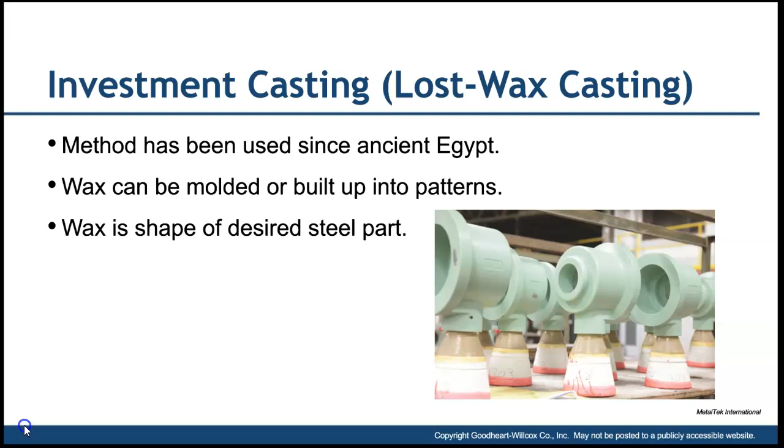So in the lost wax casting method, wax is molded and built up into patterns. So of course that wax is put into the shape of the desired steel part. Nice thing about wax is you get a nice smooth surface finish. You can form wax in a variety of different ways as well. Now, once we have that wax pattern, it gets covered in a ceramic slurry. That slurry is dried, and then the wax is melted out, leaving the hollow ceramic shell.

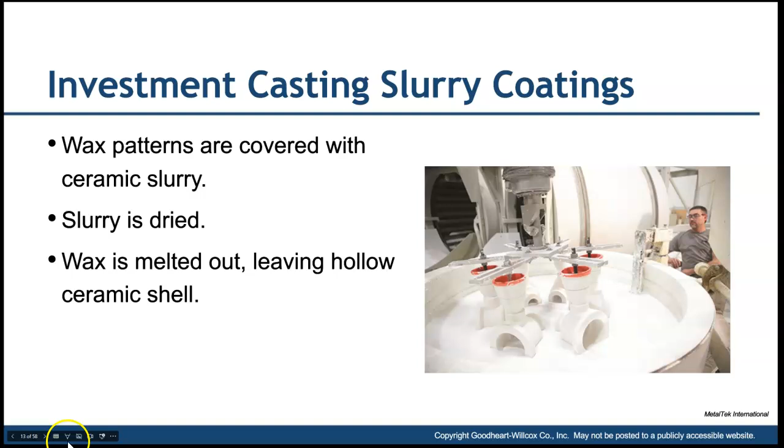So we also can do the same thing with styrofoam. The molds are then heated and liquid metal is poured into the hollow cavities; the styrofoam also gets melted out and removed and used in place of wax as well. So both of those are valid ways to help us create these cast parts.

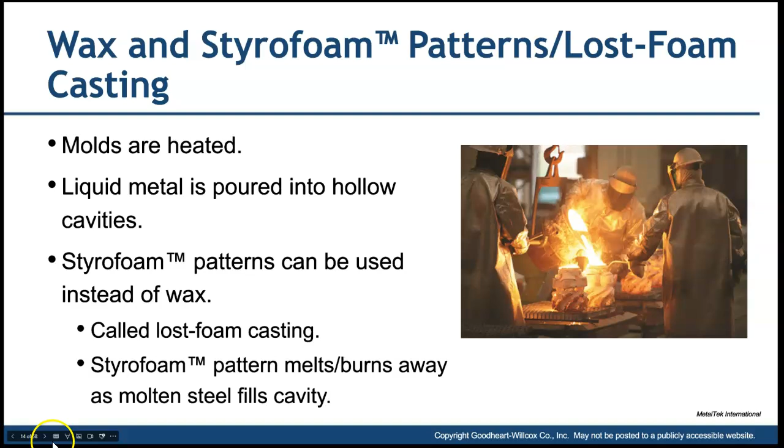So after the metal is poured into the investment casting, that metal cools, the shell is removed. So your parts have the exact same shape as the wax, and likewise the surface finish tends to be better with wax investment castings as opposed to sand castings, just because the wax is a smoother, nicer finish overall.

So generally, these parts are on what they call a sprue. The sprue is part of the actual process to allow air holes or venting or even the pour, and the connection, especially if you're doing a cast of multiple parts. If you've ever put together a plastic model kit, you have all the pieces that you break off. Those pieces are being broken off of the sprue, the plastic sprue in that case. But metal is the same way. So those parts are then cleaned up for machining or heat treating if there are any other processes that need to be done to it.

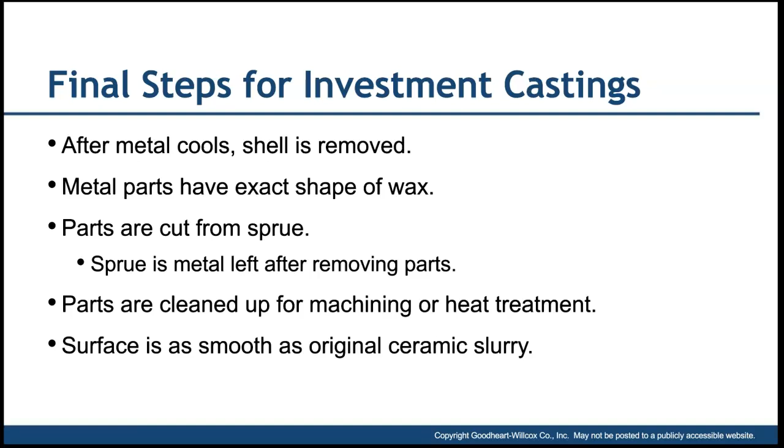Permanent mold casting obviously is used when the volume of parts dictates. So when we know that we're going to have certain types of production runs, then we can invest in the tooling to create more permanent molds for casting. And these molds can be made out of steel or any other type of oxidation resistant alloy. They are not disposable like the packed sand and ceramic shells. Graphite inserts can be assembled inside these mold forms to help us get the desired shape as well.

The steel mold itself is not touched by the molten steel poured into it. So oftentimes there is some type of material that goes in between to help as a barrier. Of course, after solidifying, the mold is opened up to remove the casting.

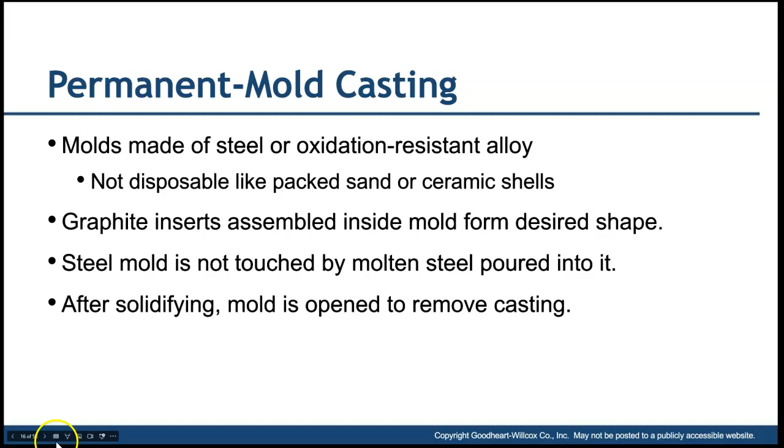Centrifugal casting is a great way to make different types of pipes. We talked before about how you could roll pipe in sheet metal and then weld it. That gives you a little bit of a variance in the actual material and changes some of the properties, especially around the weld seam. So when we're doing centrifugal casting of pipe, it gives us a much better, more uniform composition throughout the entire pipe.

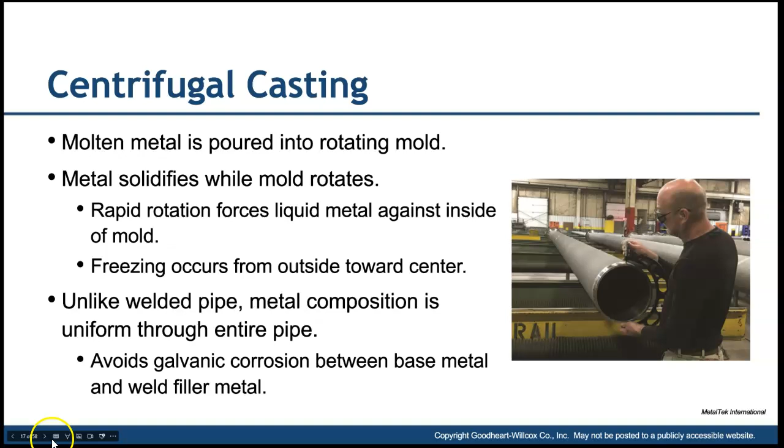And in general, these rotating molds are underground. And of course, they're rotating, which forces the liquid metal up against the inside of the mold. And then as it starts to cool down from the outside towards the center, it gives a nice uniform composition.

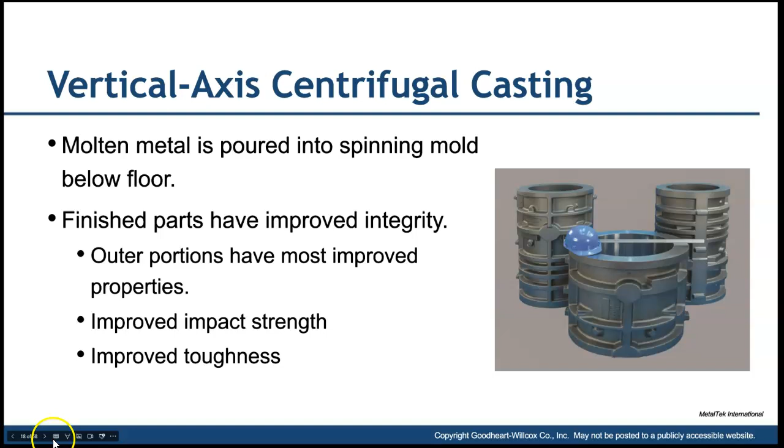Vertical axis centrifugal casting is kind of along the same line. The molten metal's poured into the spinning mold below the floor. The outer portions have very desirable improved properties, and there's lots of integrity to the different components there. So they generally have improved impact strength and improved toughness as well.

So some of the reasons for using cast steel. Obviously when we're casting parts, we're looking at the different shapes, and these shapes are not as easy to produce out of a sheet or plate.

So if we were going to do that, machining time would have to be included, and that machine time and cost to cut the plate can be kind of high. So oftentimes a cast part is done to save on machining, or in parts where we say only need to machine certain areas. So the outside of the part doesn't need to be touched, so we can just cast it as opposed to trying to machine it out of straight bar.

So your yield strength here in a casting is very similar to wrought steel. Unfortunately on a cast part, your impact strength, your ductility, that might be reduced. And of course on castings there is a coarser microstructure than on wrought steel itself.

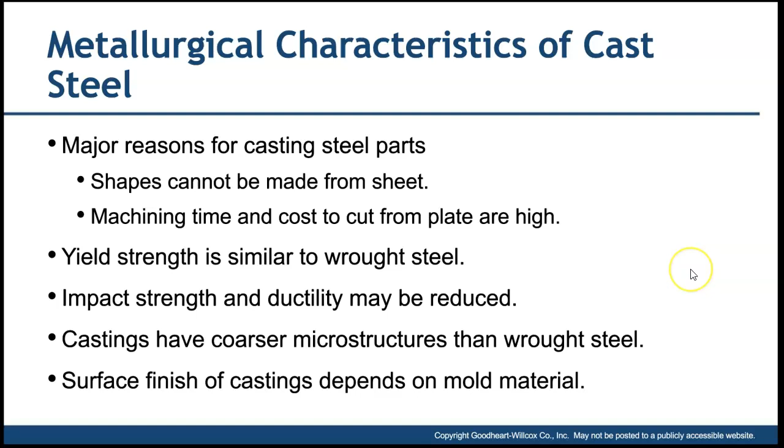Obviously with cast parts, surface finish can be a deterrent. So if you do need a really high quality surface finish, that's all going to be depending on the actual mold itself. So that might be a consideration there, whether you use a mold and a cast part versus some of the other parts as well.

We do have problems with a lot of castings, and when we have these problems, that's called a misrun. So foundries do a lot to try to avoid misruns. Again, remember we talked about the importance of getting and maintaining the temperature of the metal in the pour while it's still in the ladle. So if that pour does not flow properly, it's not necessarily going to fill the entire mold.

If it doesn't kind of get pulled through the mold, or depending on the temperature as it cools, you might also get voids inside the actual material as well. That's going to cause those castings to be scrapped. We don't lose that material. That material can be remelted and reused. However, you do lose a lot of production time. So obviously companies want to maintain this for their efficiencies and do better.

And of course, if those particular parts and castings would get out to a customer, that also can kind of influence a company's reputation. Too many bad castings being sent to a customer can also cause companies to lose that customer, where they go to somebody who can provide them with a better quality part. So keep that in mind there as well.

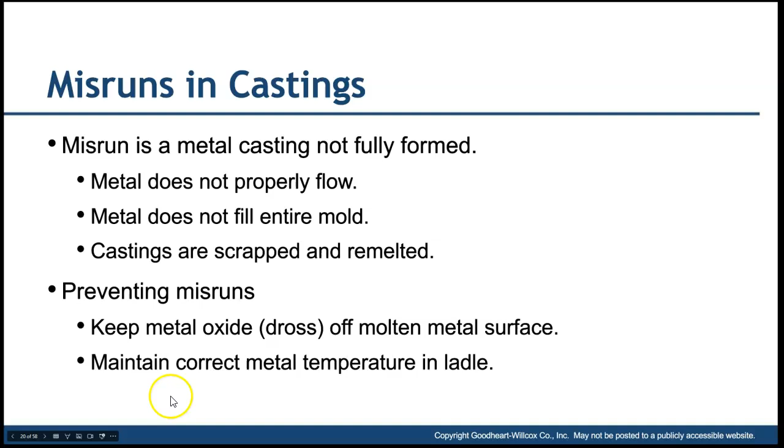In order to prevent that, of course, you've got to really maintain the metal temperature there in the ladle. And of course, we've got to keep different types of metal oxides, what they call dross, from hitting and touching the molten metal surface or contaminating the actual liquid metal as well.

Here's where we're talking about casting voids. So we get different pockets. I've got some material in the lab, some plastic, that is a good example of this, where the inside of the actual material is hollow. So they didn't get a very good pour, and they made some bad material with that. So we want to make sure when we are casting parts that we're getting good castings and we don't have voids in the center.

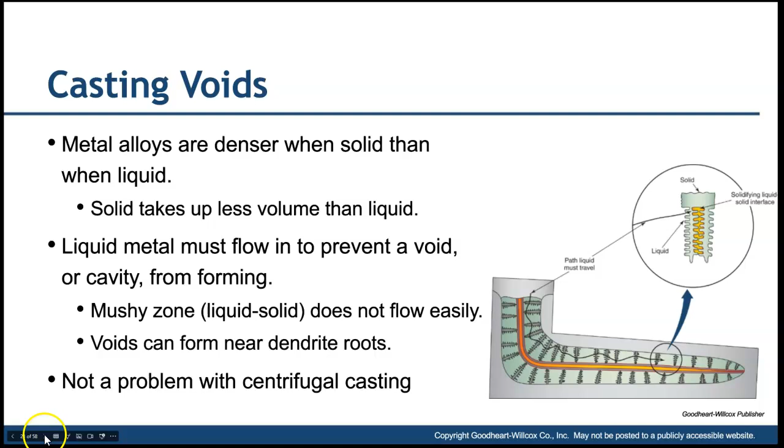We get casting porosity. So as that is poured, the gases in the solution, obviously oxygen and nitrogen, can cause bubbles. So we want to try to get that out. And porosity in these castings, I'm sure if anybody has machined sand castings or some different type of cast iron, sometimes you will see these bubbles that are in there. And that of course will cause rejected castings as well.

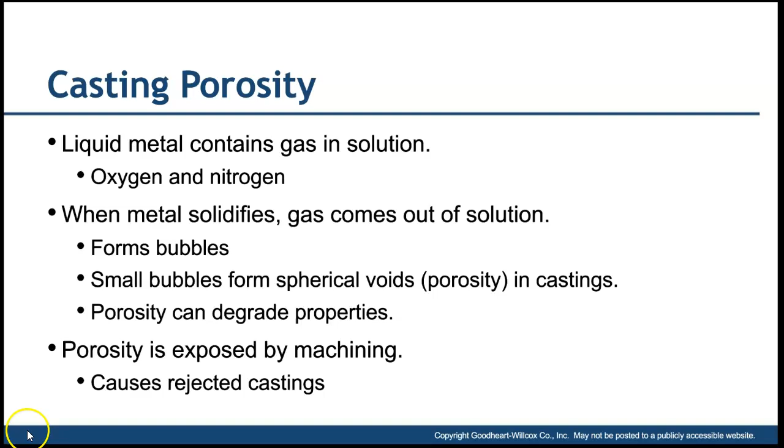So the foundries want to produce a good product. Companies' reputations are based on this. So if you're going to work for a foundry, you do want to pay attention to this and talk with the more senior people on how they make sure that they are maintaining consistency and a good quality, reliable product as they're working on the shop floor.

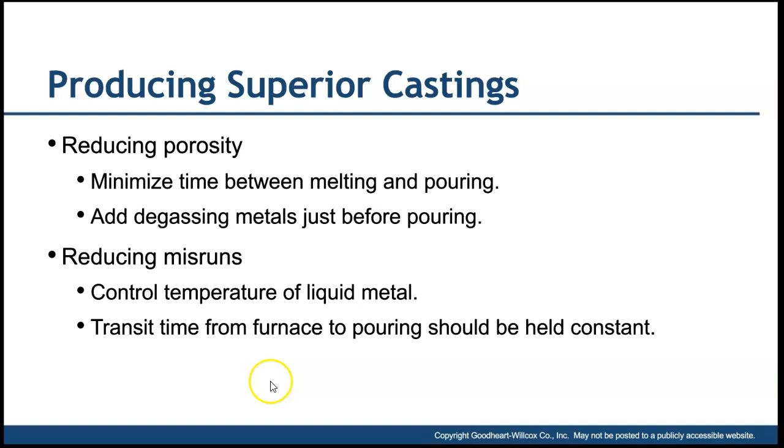Here are some cast steel applications. So obviously some of these large parts here are cast: bearing housings, valve bodies, food processing equipment. Electronics, the oil and gas industry uses these, the transportation industry. In our area, probably one of the largest consumers of these, well, actually two companies: Mueller makes a lot of castings here, as well as Caterpillar.

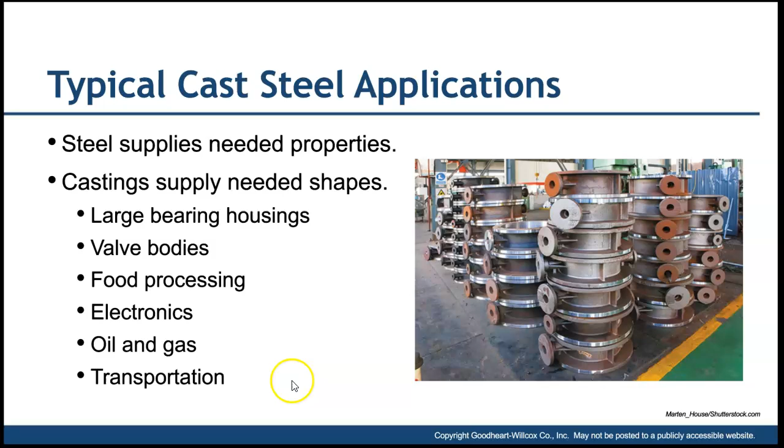Caterpillar, especially for the very large parts, is using castings, as well as the next type of material that we're going to be talking about, and that is, of course, forging. So I'm going to stop this video here. We'll come back for part 3 and talk about forging.